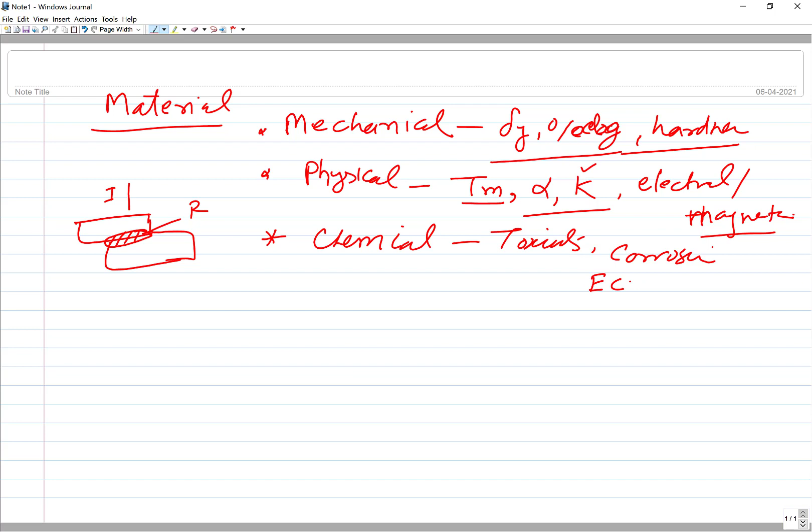It also dictates corrosion or chemical action. There is an advanced manufacturing process called electrochemical machining, where the chemical activity of the metals with the chemicals plays a role. So these are the properties which need attention while choosing a suitable manufacturing process.

Another important aspect of manufacturing process choice is the volume: how many units we want to produce, just 2 per day or 2000 or 20,000. That significantly affects the choice of process. Every process doesn't have the same capability to manufacture at the same rate. Each process is unique. So depending upon the production requirement, the rate of production needed, we have to choose the suitable manufacturing process.

In all manual manufacturing processes where manual intervention is needed, you cannot really achieve an extremely high rate, because eventually a human being will be working on the machines or using some tool to make something, and you may not be able to realize a very high production rate.

So for low production volumes, job shops, batch production, maybe manual manufacturing will be fine. But if you want very high volume production, like 20,000 units per day, then certainly you need some kind of automation in the manufacturing approach.

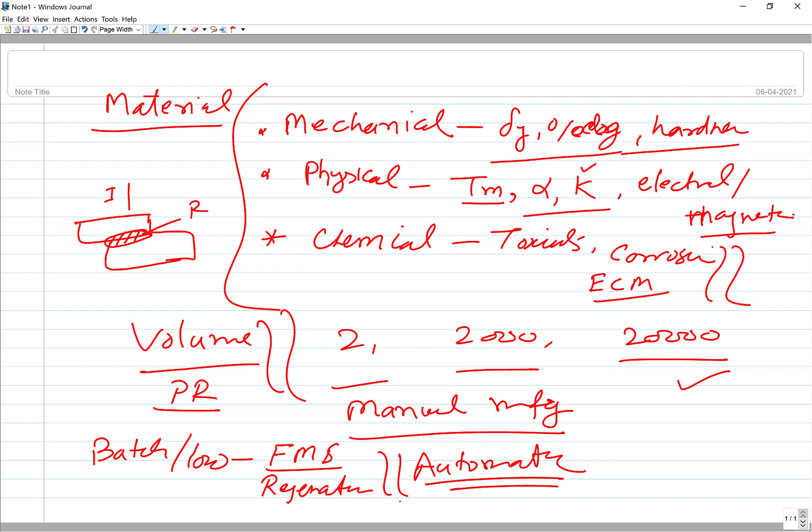If you want high volume production, then certainly we need to go for automation, the heavy, big, robust automated machines. As far as the process is concerned, machining is good enough, material removal based processes are good enough to realize the desired products, say up to maximum 500 units.

It's like per day, depending upon the production capacity. Again, it's a very subjective thing, depending on which kind of facility, which kind of machine that you have. And if you want even higher volume of production, then deformation based processes are used when the number of units desired is more than 1,000 or so. It will depend—like nuts and bolts, in 1 hour maybe you can produce 1,000. So depending upon the kind of product, depending upon the system that you have, that will affect the volume production rate significantly.

But if we need low production, manual manufacturing processes or FMS or regenerative processes will be fine. But if you need high volume production, you need to go for deformation based processes, you need to go for automation. So these are the two aspects.

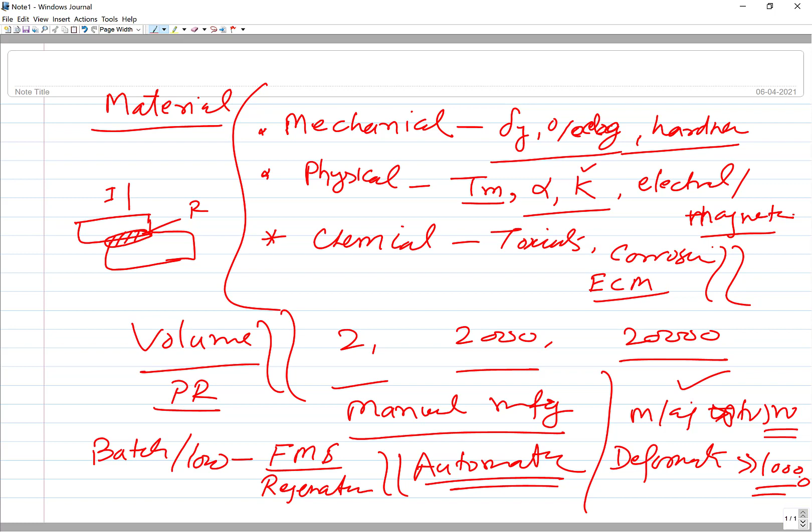Then there are other quality related aspects. What are those quality related aspects? If you see, there are two aspects: how accurately we are able to manufacture the product again and again. So there are two words.

So in that case, the plus minus 0.02 will be the kind of variation on both sides about the 10. Our intention is to make it 10, but it will always be varying, not exactly always hitting the target of 10 mm, but in actual manufacturing it will always be changing. It may be 9.98, or it may be 10.02, like this. So the variation about the mean value will be like this. It can be 10 plus minus 0.2, or it can be 10 plus minus 0.02. So this is very close variation—extremely small—and here the variation is very large.

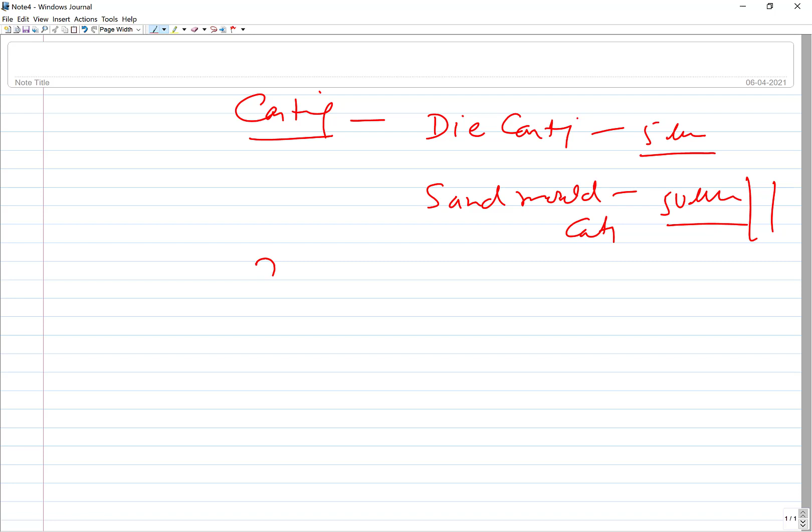Similarly, for deformation based processes, if you go for hot deformation it may be 20 or 40 micrometer, but for cold deformation based processes, maybe 5 micrometer itself. That will depend upon a number of other factors, but each process has a different capability to make products of different roughnesses. So roughness is another important thing that has to be considered, as it affects the functioning and performance of the products being made.

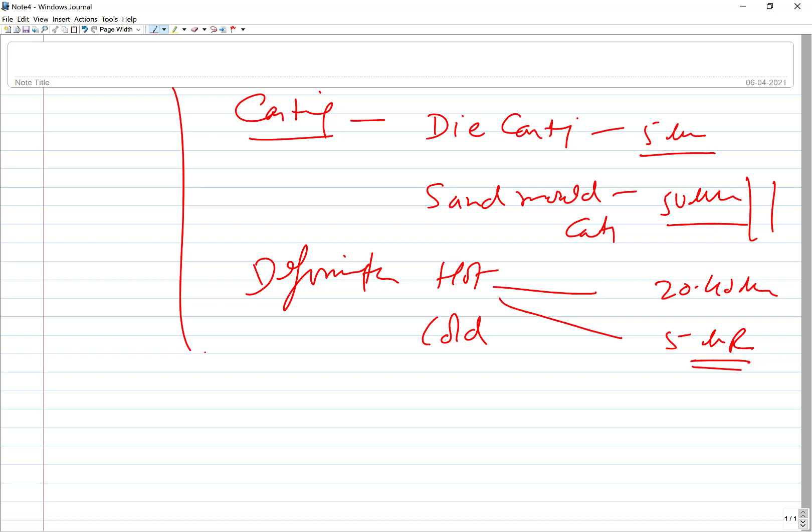Professor Varun, please unmute me. Hello. Hello. Okay, just a minute, let me see. Okay. Yeah, it's fine, I think I'm audible now, right? Okay, that's fine, oh okay, right.

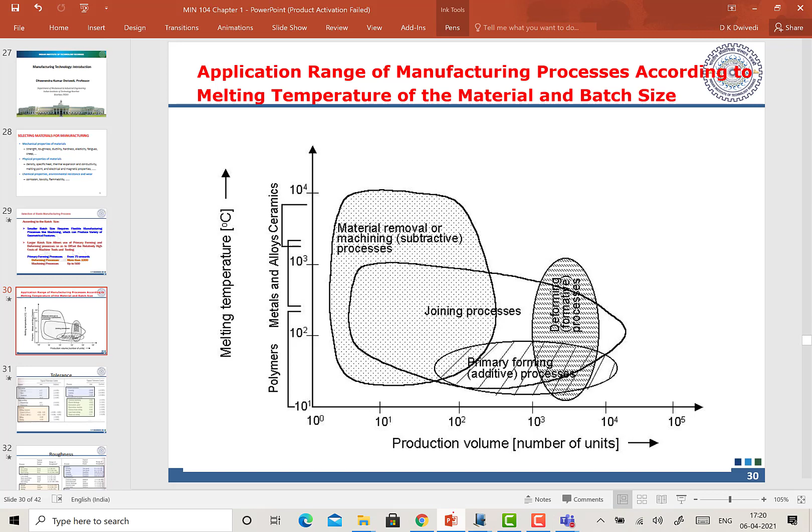So here, okay, this is what I was saying - the property, how the property and the volume of production are related, in this one diagram.

Okay, it's fine, I'm audible now. So this plot relates the volume of production and the material property in terms of temperature.

The low melting point materials like polymers, most of the plastics; middle or intermediate melting point materials like metals and alloys, say up to 1000 or 1800; then the ceramics. And the volume of the unit, say just 10 up to 10,000. If the two are clubbed, for moderate volume up to say 100, and for a moderate to wide range of hardness, the machining is good.

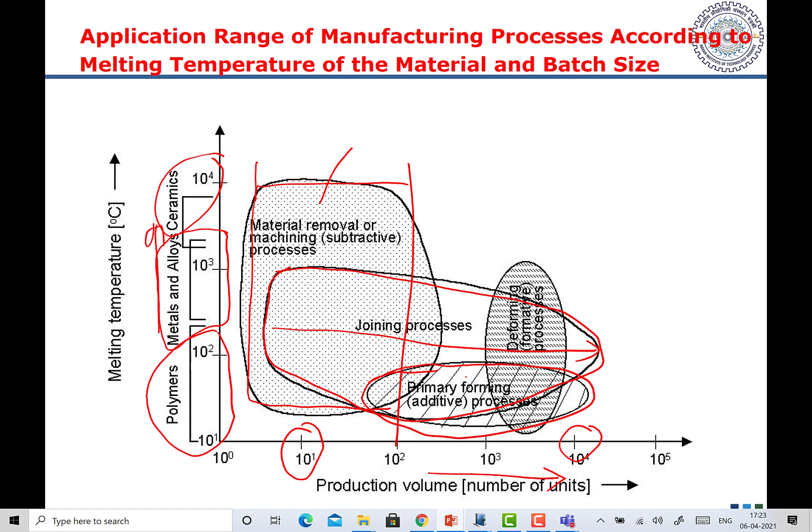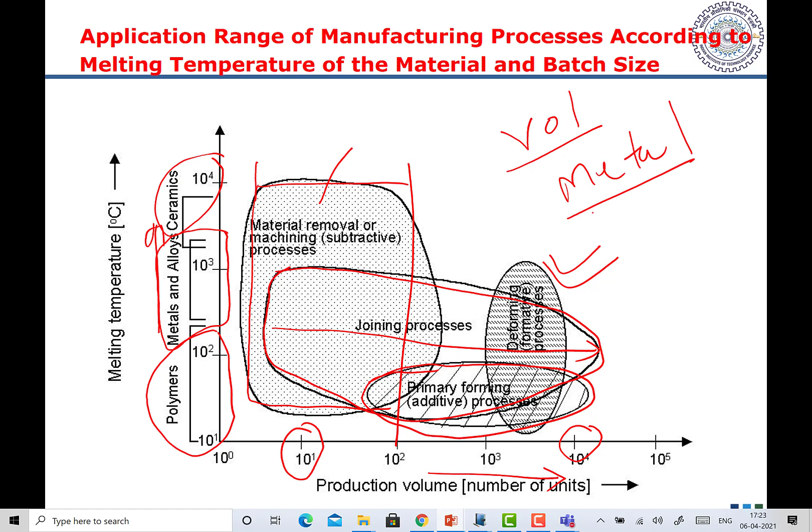Joining is for the intermediate to low melting point metals, and the manufacturing volume production can vary from very low, 10, to say 10,000, like it is used in cars as well. Primary forming processes like casting and forming are used for low melting point materials as well as high volume production. Deformation based processes are primarily used for high volume production and for metals as well as low and intermediate melting point materials. The point is, in manufacturing, the volume and the metal to be processed significantly dictate the choice of the suitable process.

Okay, so that's what I said. Now coming to the tolerance, the different processes offer different tolerance. Say for casting, the tolerance is in this range, in mm, for that is about the casting.

Then for machining, the tolerance is very close. So the primary shape is realized through casting having greater tolerance, and the tolerance is reduced when we use machining. Close tolerance is realized, and during grinding it is even closer. In non-traditional machining process it is intermediate. So grinding gives minimum tolerance, and the maximum or higher tolerance is there in case of the cast process.

So the different processes offer you different capabilities. That is the point of telling all this in this slide.

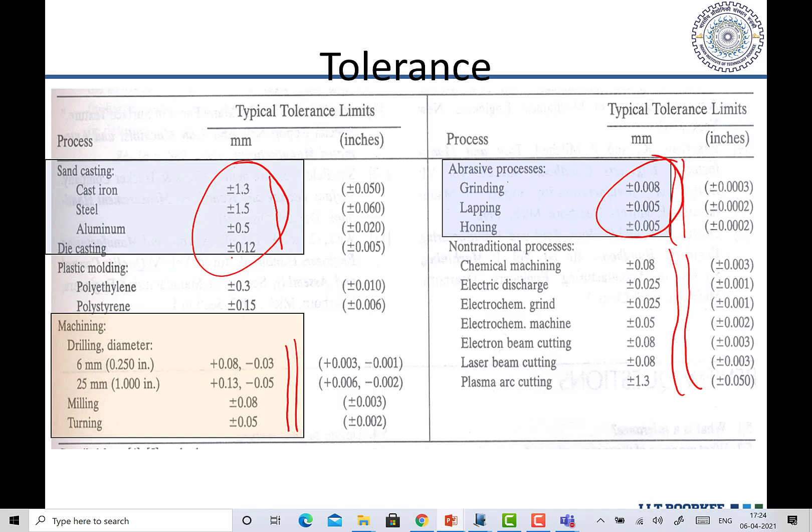Now as far as the roughness is concerned, the roughness in the case of casting can range from say very low value, 1 to 2 micrometer, to very poor, say 10, 12 to 25. Even in some cases it's 50 for the coarse sand mold.

Then metal forming, it is low. Hot forming, it is high, as I said. So the forming process, the roughness is different.

For machining, the roughness realized is really low. For finishing, it is very good and excellent surface finish is realized. And for non-traditional machining, it may range, it may not be as good as expected, but it is not even finer than what is realized in machining or abrasive finishing process.

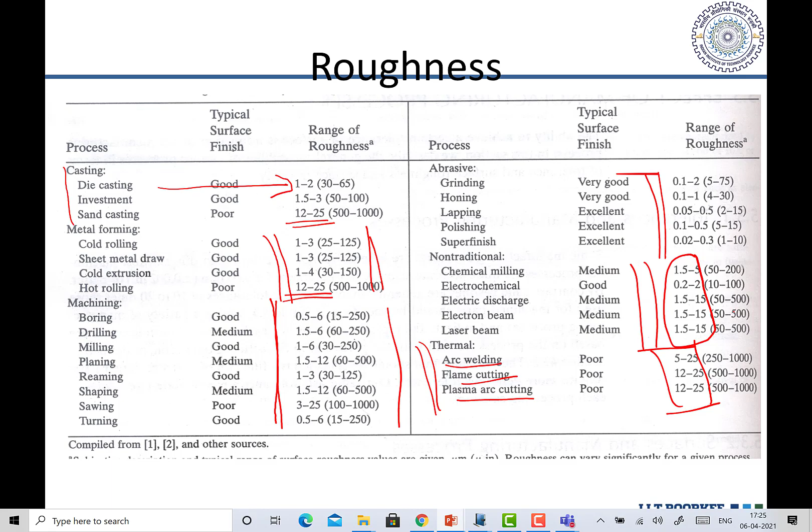Normally, the thermal processes like arc welding, flame cutting, or plasma cutting, they offer poor roughness because the idea is to melt and then cut. So the roughness is really bad in case of thermal processes. Okay, so this is what is there.

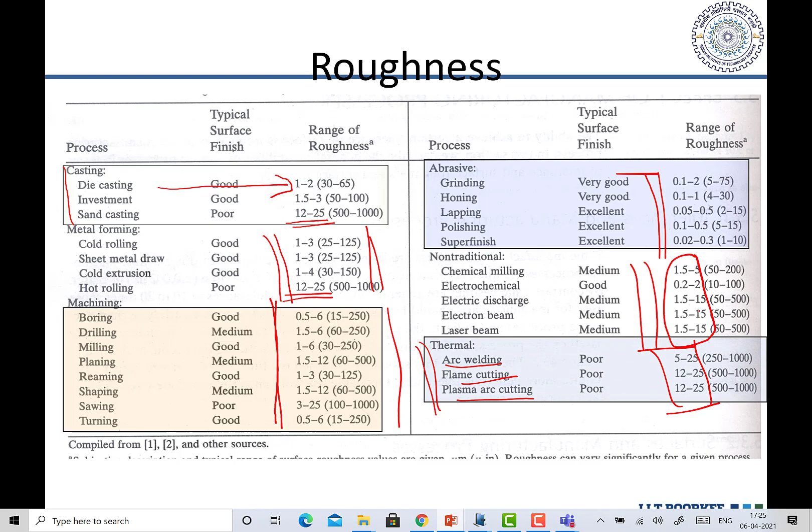4 categories as far as the roughness, the ability of different processes to make things of different finishes, is concerned. This chart is just to give an idea, because I will be going back to the whiteboard. What it shows: cost is one factor, production rate is another factor, quality is another factor, and ability to get change and manufacture different kinds of things is another factor.

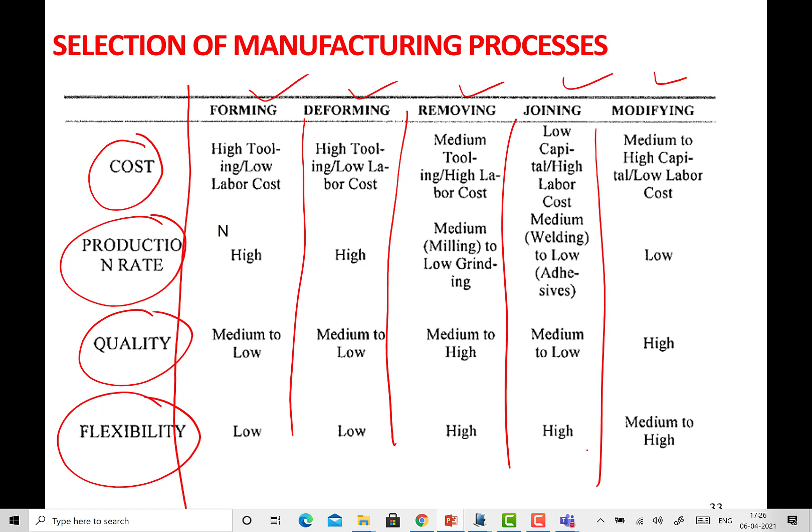So if these 4 are the major factors in consideration, then out of these 5 processes, which one is to be chosen? Each offers a different capability. Since each works on different principles, they offer different capabilities. Okay, so this is just the point.

Let me go back to the selection approach. I'll be using again the whiteboard. So here what I have with me is this, the procedure for selection of manufacturing process.

Okay, so the first step here is identify whatever is good for you. Just develop a list of the parameters of relevance or importance for you. Whatever matters, just note it down. Relevance from the manufacturing point of view, whatever is important: cost, flexibility, production rate, availability of machine, availability of material, labor, whatever is coming, just note it down.

Then out of that list, this is called establish the selection driver parameters. Selection driver parameters, this is the first step. Then out of those selection driver parameters, what is most important for you, then select the criteria which you would like to use. So out of those so many parameters, come out with a few. Select the criteria for selection. First develop a list, then select the few that are most important for you.

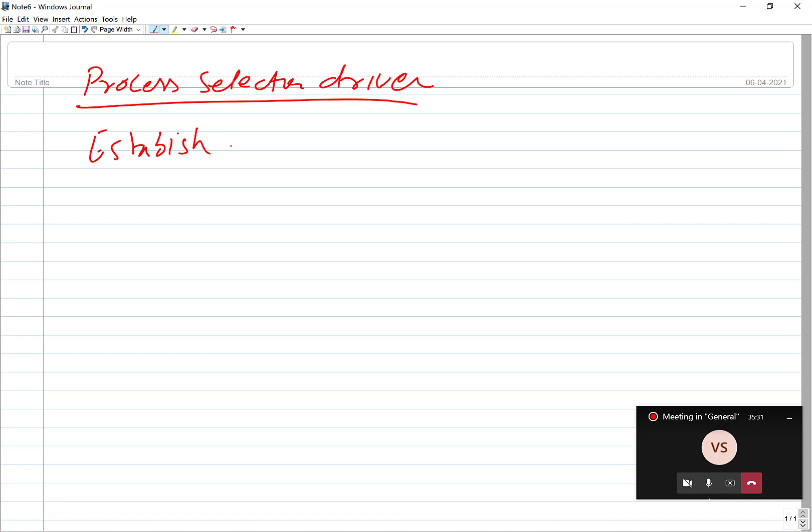product dimensions and size that is to be finished, surface finish desired, the tolerance desired, the wastage which is to be controlled, the maintenance cost, and eventually all total costs. This is a simple list of parameters. All may not be important. So among those many parameters, establish your own priority list of parameters.

Which may be in the form of, say, the volume or the production rate, or the cost of the product at which you want to make it. It can be the geometry of the part which is to be produced. It can be the tolerance that is to be realized for proper functioning, or it can be the metal which is to be processed. So all that is to be prioritized.

As far as the selection of manufacturing process is concerned, for a given product these are the properties desired, and for those properties you have identified a particular metal. The moment you identify the metal, the choice of the processes is narrowed down significantly. Why? Because if the material is polymer, you know that injection molding or the plastic molding processes need to be used. If these are metals of low melting point, you know certain processes are there.

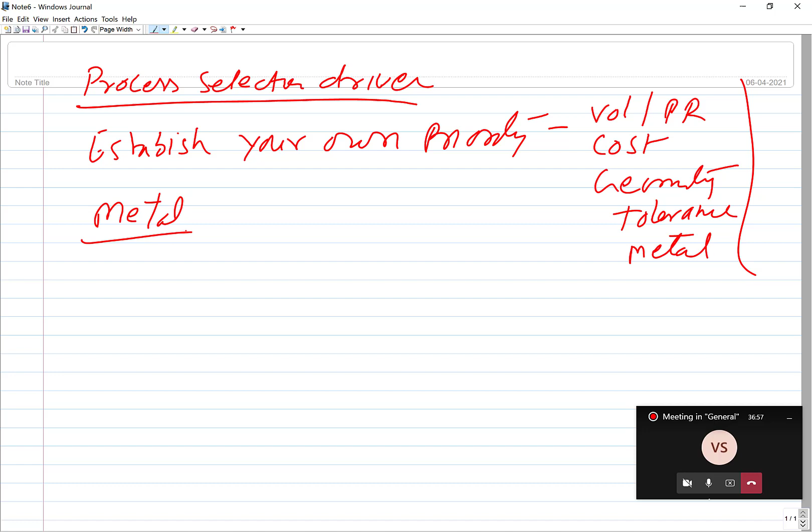If the material is very hard and it is made of ceramic, you know that powder metallurgy or the advanced machining processes need to be used. So the moment you identify the material of which the product is to be made, the process choice is narrowed down significantly. So if it is low melting point, you can go for welding, you can go for casting, and there are a number of casting processes.

Likewise, if it is low yield strength and high elongation, you can choose deformation. If thickness is less, use forming. If thickness is more, some other processes are to be used. Then the volume of production is another important parameter. For high volume production, no manual processes; only automation or high volume production processes need to be used.

Likewise, geometry. Thin sheets you cannot cast. As I gave you the example last time, for thin sheets the raw material is to be deformed into the desired shape, like all car bodies or trucks or even aluminum products made of thin sheets. They are made by deformation, and then final finishing and dimensioning is done through machining. So the geometry and tolerance are the other parameters.

Once you have done this, identify the suitable potential processes from that list, and out of the few processes left, you select based on your experience and exposure which process will give you the minimum cost, the desired production rate, and the desired quality of product. So again you choose fewer processes based on your experience.

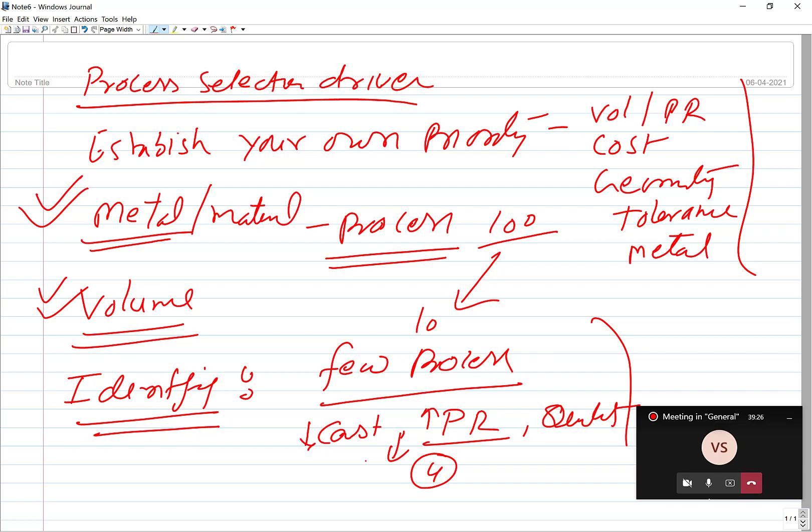Earlier you had 100, now you reduce to 10, and out of 10 you have reduced again to 4. Out of 4, one has to be chosen. So now we can come up with a decision matrix. The decision matrix works in a very simple way. Here we will be writing the parameters which are being considered: low cost, production rate, the quality of the product being realized, and flexibility.

It is possible that all these parameters may not have equal weightage. If the cost is most important, give the maximum weightage to the cost. If the production rate is important, give the maximum weight to the production rate. If quality is important, give the weight to the quality which can be realized by option 1, which may be from casting, forming, machining, or welding. There will be a specific category of processes in these broad groups of processes.

Okay, so if the cost is of the greatest importance, thereafter the quality is important, so give the weightage, say, 15 for cost, 12 for quality, 10 for production rate, and say 8 for flexibility. You can assign any weight as per your convenience, as per the relative importance among these factors. Now all these options of the available processes need to be rated on a scale of 1 to 10 or maybe 10 to 100. It's your choice.

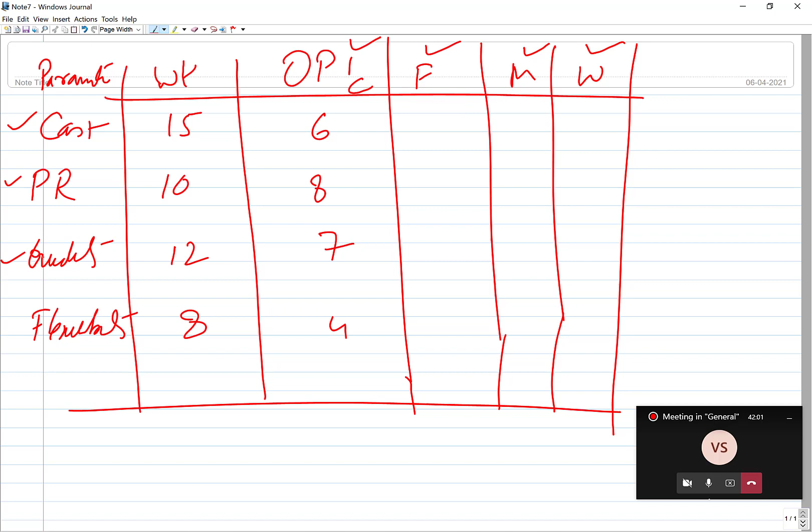Okay, I'll give another example. Say forming is very good cost-wise, so 8, and production-rate-wise it is also good, so you may give say 10. If it is low quality-wise, you may rate 5. Say it is less flexible, so you may rate 4. So now what you have to do is multiply the weight factor with these values. So here you will have 90, here 80, here 84, and here 32. Obtain the sum of these values.

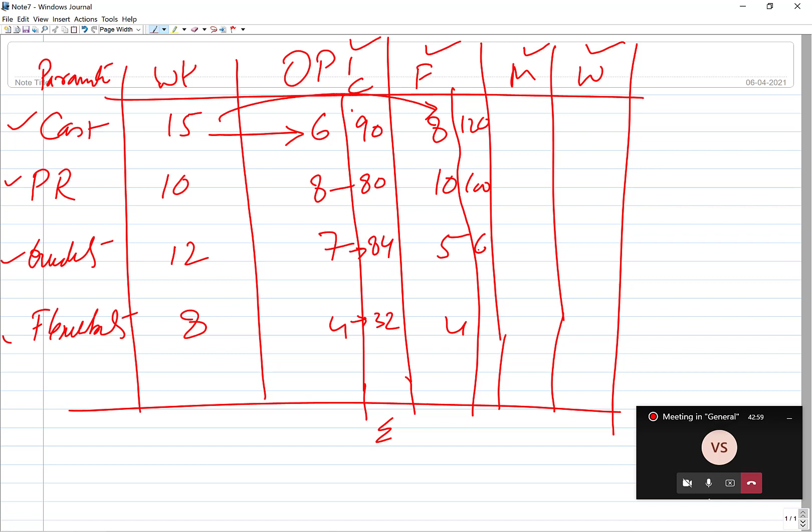Similarly multiply the weight factor with the scale or the value assigned to another process. So here it is say 120, here 100, here 60, here 32. Again obtain the weighted sum. Likewise for all four processes, the sums of these weighted values are identified, and the one having the highest value, that process is chosen.

Just for an example, I don't know how much the total will be. Say here it is 320, here 180, here 120, and here 50. So obviously the one having the maximum score will be chosen. So this is how, when you are dealing with multiple factors and multiple options, you can apply the weighted decision matrix for choosing the suitable process.

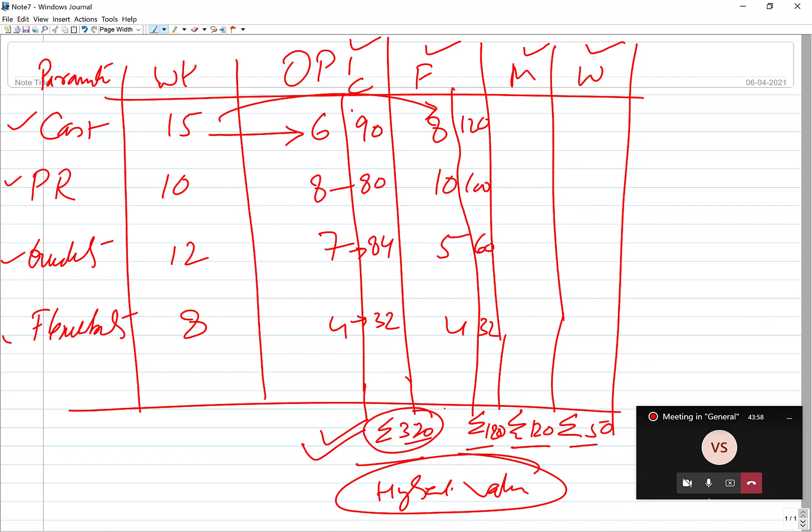Okay, so now I have completed all this selection-related material. There are a few more slides, but that will be just repetition. So here I will stop.

Yes, I agree with the observation, and this is what is needed. If you are not satisfied with the importance being given or the weight being assigned, there is no fixed way of giving the weightage to a particular parameter. If you agree on the weights being assigned, then let us go with that. And it is not done by one person. These kind of things are done by a group of members.

Say you have 10 people, all doing the brainstorming, identifying how much weight can be given to cost, how a particular process is to be rated with regard to quality, because this is subjective. So based on experience, you will have people in your team from manufacturing, design, sales, maybe the customer. All those stakeholders are brought together, and their inputs are used to decide how to rate a particular process with regard to the parameters of importance.

So once we agree, whatever weight comes, we need to go with that. You can always do iterations. If in one go you come up with one process and are still not satisfied, go for a second round. Choosing a particular process for manufacturing is not done in one sitting. Keep thinking and try to optimize, because these are big decisions. They affect the economy of the entire plant, and survival will depend upon this. So I hope you have understood what I tried to say.